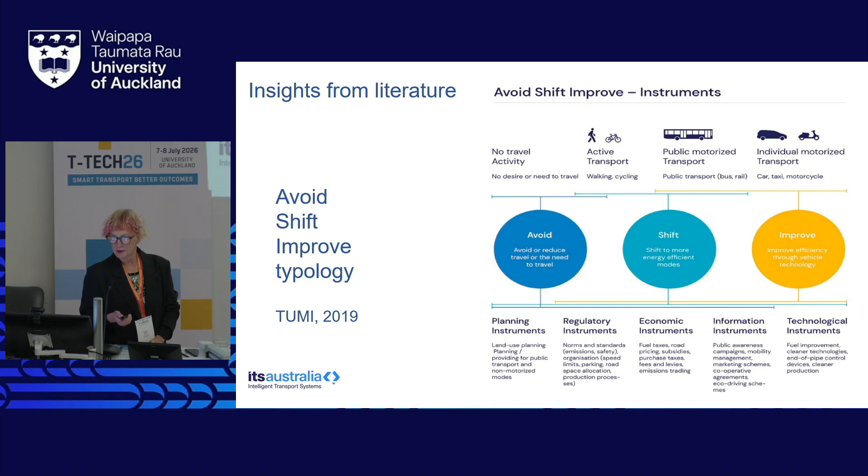Shift and improve: shift is getting people from their vehicles into active and other transport modes like public transport, and improve is usually the most expensive bit - service improvements, network improvements, and technological interventions that give people better opportunities to change their modes. These are the other ones. We were working from the top down.

Obviously, governments and other network managers do the capacity creation and network management side of things. We were looking at better understanding that behavioural change and other opportunities for moving people into different modes.

So taking all of that insight and the analysis from ITLS, we then interviewed some subject matter experts - people that work at the front lines of these things: disability activists, government agents, transport providers, and people from overseas as well. Just to get a better understanding of their experience with some of these interventions, so they know they work, they know they don't work, and that took us through to the survey structure.

As you probably know, designing surveys is really tricky. People don't lie as such, but self-reporting can be difficult - people can find it hard to remember how much they travel, why they travel, how they travelled. So it was designing a pretty complex survey around this concept of windows of change: different times of life, job change, employment status, moving home, change of life, babies leaving home - and taking them through a series of discrete choice questions to get a pretty definitive answer. Coincidentally for us, a lot of this is around price sensitivity and better understanding what the charge model might be if they want to change from a current system to a road user charging.

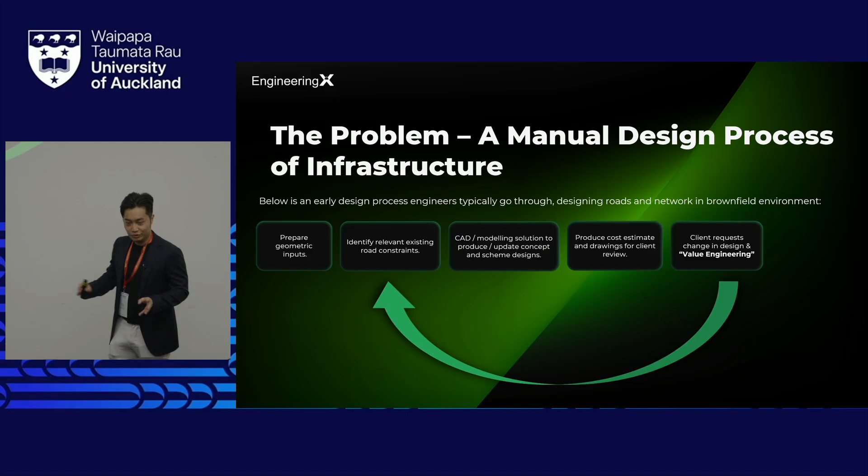That is the moment when engineers try to fit the design cross-sections into the drawings and find out there are a lot of pinch points and locations that simply just don't fit in the road. Some of the area of the road will be wide enough to fit the design cross-section. Some of it is just not.

So in terms of those pinch points, the engineer then checks the design requirement, makes some sort of suggestions of departure from standard, and then makes trade-offs to decide whether we add a speed table or not. Is it a cost constraint? Do we have enough cost? This is the process we call value engineering.

But the process of value engineering is manual and iterative. Why is that? Because clients simply want to give you feedback about the design you have made. They want to take your design to public consultation, get the feedback from public. They then go through internal design review process and give you feedback.

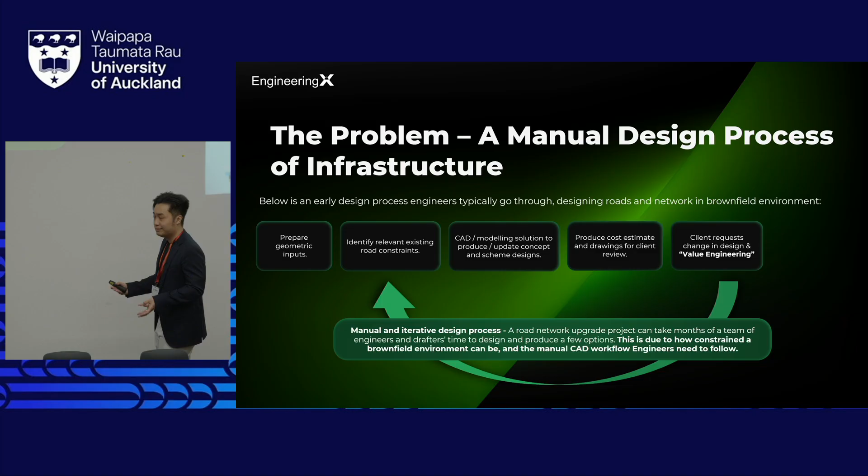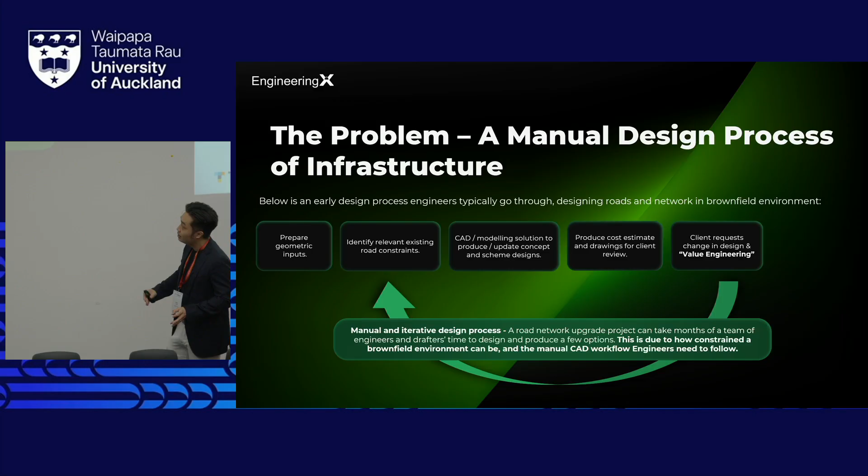So the engineer tends to take that feedback, update and iterate drawings. And this simply leads to providing just a few options - why is that, in a time span of months to years, only a few options? It's because of how constrained a brownfield environment can be. Something changed - simply a GIS input change because of the site survey data - can change how the design and how the drawings would be. And also, it's because of the manual CAD workflow that engineers need to follow.

After that process, multiple iterations, the engineer finally gets to the final design and cost estimate for the client. That's when the client receives the deliverables.

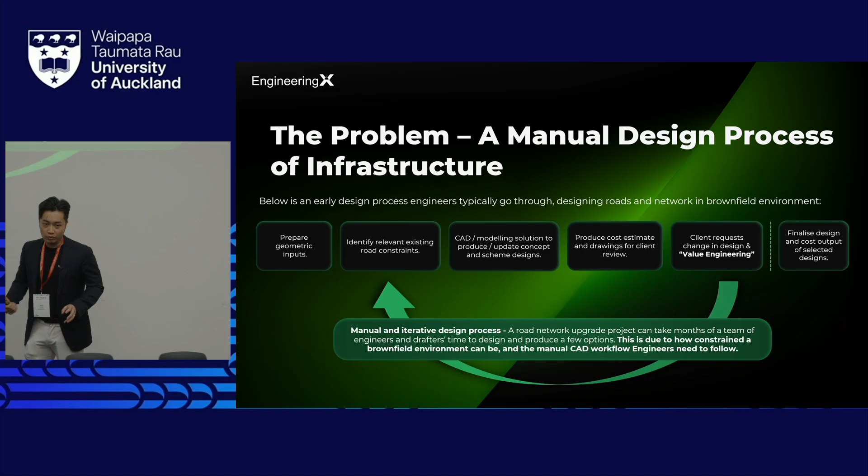What if I told you there is a platform, a software that can give you all design cross-sections automated, design drafting automated, vehicle tracking automated, network design, roundabout design, network multi-traffic phase analysis—all can be automated in one platform.

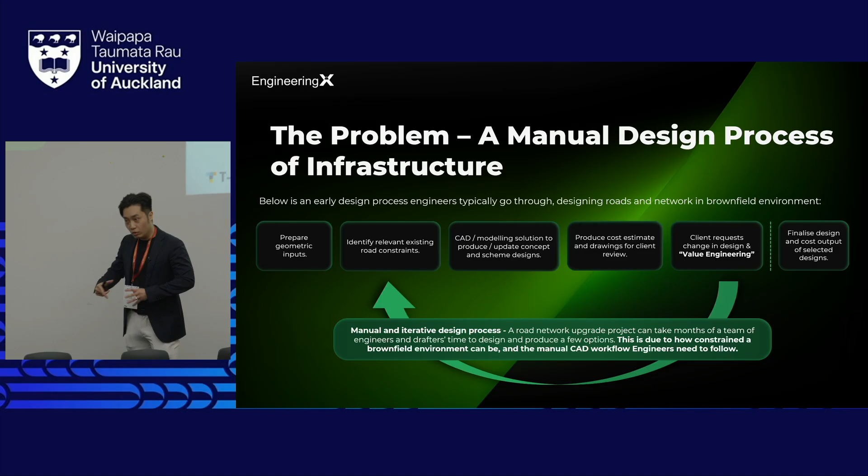We want to introduce you to AutoRoads Design. This is a design platform that takes all the GIS data when an engineer starts a project, simply takes that input, and automates design cross-sections, all the available ones. Based on different roads, we'll have different sets of design cross-sections. Engineer picks one design cross-section, then overlays and optimizes it into the road being designed for.

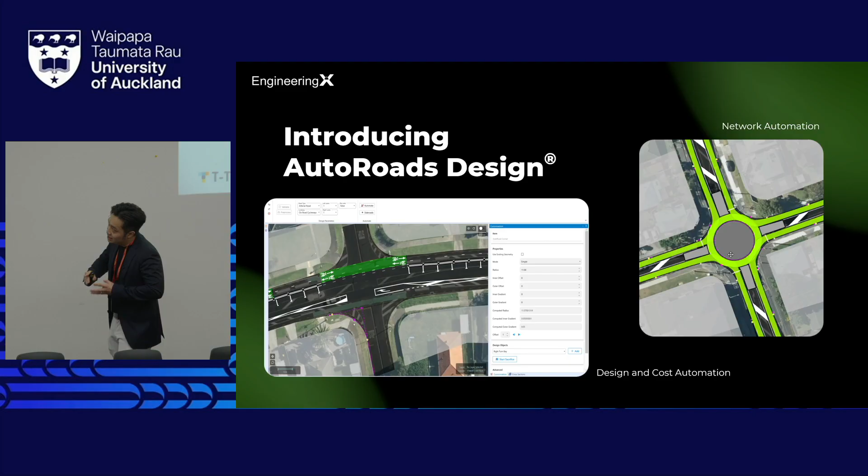And safety elements like speed tables and right turn bays can simply be dragged and dropped in the model space. You can see when you expand and add a right turn bay into the road, all the side road curves and intersection corners are automated together. Another example would be the roundabout.

You're dragging the roundabout into the intersection. You see the blue lines—the new curb lines—all automated, pushed to the side. And all the surrounding green hedge-like shape is the vehicle tracking. In a roundabout design, we have all the vehicle tracking automated, wrapping around the central island, making it really easy for the engineer to see the pinch point, understand the site, and make design decisions.

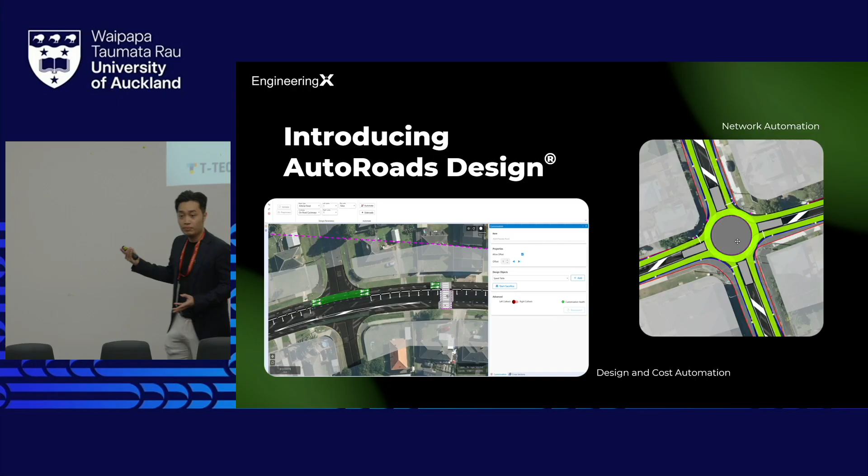Whether we have a bus as the design vehicle, we can automate it. We have a car, or delivery van as design vehicles, we can automate it accordingly. So no drafting required.

Every constraint affects engineering decision. Think about a right turn bay—different width means the road will have to be widened differently. A speed table, whether it's a Swedish type, normal speed table, or even a speed hump, has different width requirements, widening the road differently and affecting different utilities. The position you place the speed table will also affect how vehicles come in and out of the driveway. And simply placing a bus box adjacent to different driveways might cause coordination issues with property owners and so on. So every constraint affects engineering decision.

AutoRoads Design takes all these constraints, and it is a coordinated system that considers every single element in here. We know that if we move something, the adjacent area would have to provide spatial requirements and enough width. So this is a coordinated system.

You don't need to go back to AutoCAD, go back to OpenRoads, then send your drawings to different places to get what you need. This is one single platform where you can get your cost, you can get your design—we're not talking about months, we're talking about minutes and days. Your client will get all this design information in the earliest phase, so the client can make the most informed decision about whether a project can be delivered from the start or not.

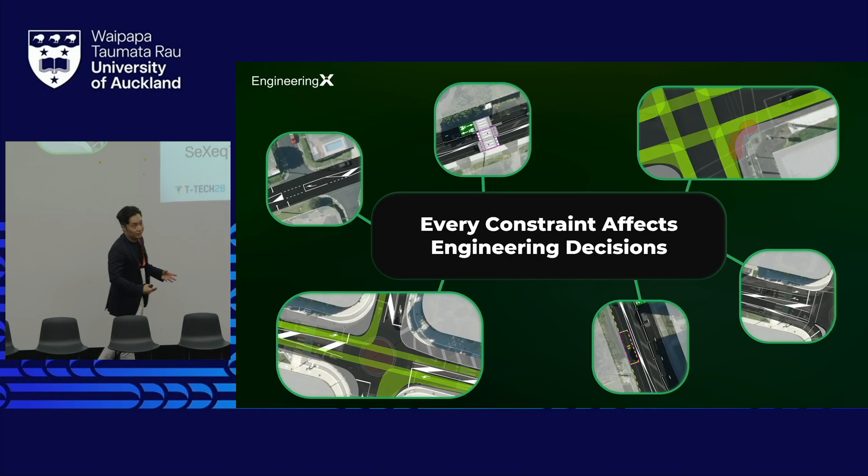One of the driving factors in our software is called the vehicle tracking engine. I've got Han Wei Peng here, our CTO, who will talk a little more about how vehicle tracking works in our automation software. Han Wei, hand over to you.

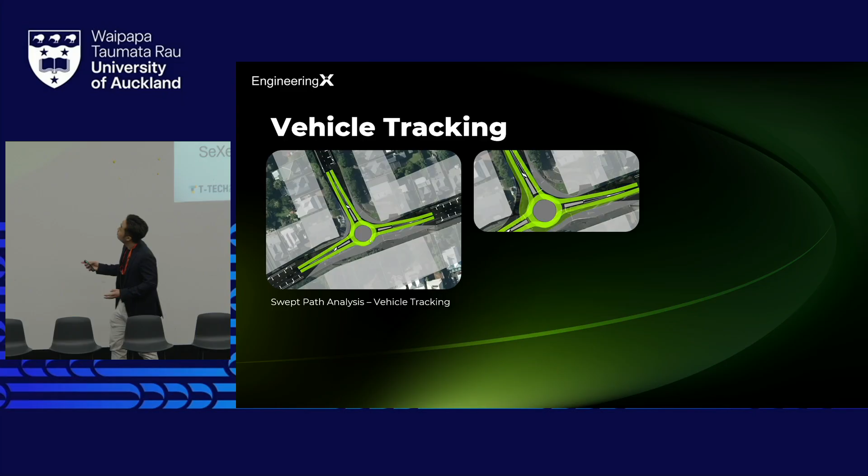Thank you, James. When we think about vehicle tracking, we think about swept path checks around these vehicles on the road corridor. But I want you to think about what if, in a brownfield context, there's a harder problem to solve to enable the system to work. If we think about vehicle tracking in a brownfield context, we think about vehicle tracking through multi-obstacles, where we have to avoid multiple islands, multiple clearances, and various curbs along the way.

For example, in this roundabout you see, there are multiple ways to actually go through it. With our innovative solution, we provide vehicle tracking where we can avoid the circulating roundabout and update it speedily in real time.

What does this mean? This means that in comparison to AutoCAD, where we use static vehicle tracking with an individual tracking profile that's not tied into or integrated with any sort of systems, we're looking at manually having to track through an iterative process to enable a design.

What we have provided now is an integrated system which includes tracking as part of the customization process, and engineers are able to update items interactively to get real-time information about where the design can be better and in which way we can improve the design very fast and very reliably.

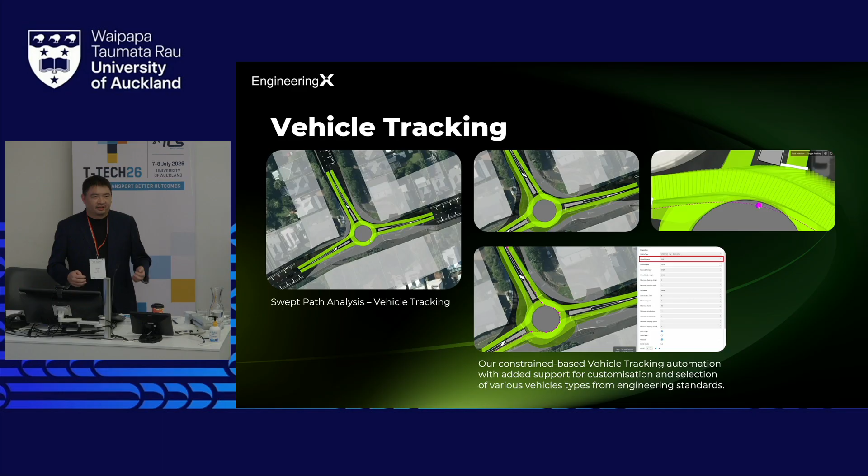Now I'll pass on to James. Just seeing the time limits. So just to conclude what we bring to you guys today,

Engineering X is striving to provide a solution for all the engineers and end users here to deliver better solution, better options, better value for client through providing a lot more options, not just multiple options in the traditional design phase, but we're providing 10, 20, 30 design options in minutes and days rather than months to just multiple options.

So with that in mind, we would like to thank everyone for listening to us and really thankful that both Hanwei and I come back to present to our university, to our previous lecturer, and to you guys. Thanks.

Thank you for keeping to time. We're running a little bit tight, but I'll ask one question. Is there a case study where you have already implemented this design software into practice, into New Zealand real-world projects for Auckland Transport or NZTA, to prove its robustness and validation?

Yes, we have. We've been in pilot and proof of concept engagement with leading agencies like Auckland Transport and international consultancy to validate our software. Positive results have shown. For example, one case study is an Australian project where they took our software to automate intersection design in minutes. Those results were then exported and provided to the client, and positive feedback came back. This proof of concept and pilot engagement is ongoing, so there will be more case studies coming in the future very soon for the public to see.

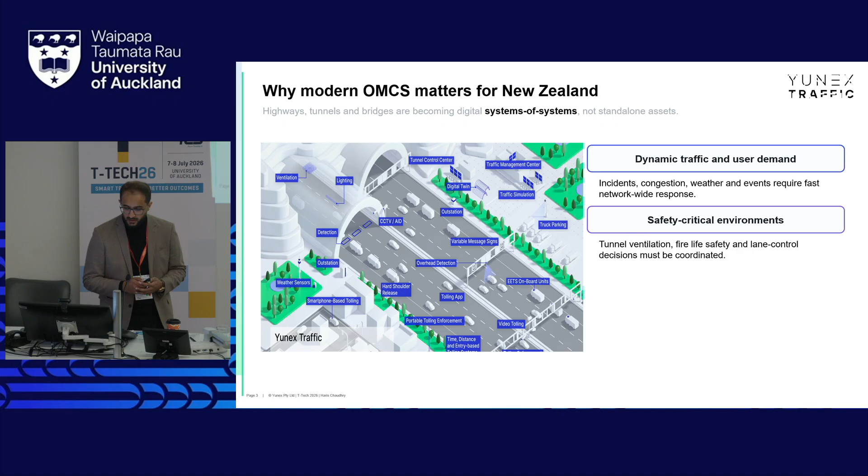So the question becomes, what do we mean by, or why do we want the OMCS to be modernized? Simply put, I can put it in three terms. Number one is the dynamic traffic and user demand. As the population is increasing, the demand is increasing, the use of technology is increasing, and we have to make sure all those technologies work in harmony with the strict safety compliance requirements. We have to ensure we're providing support for ventilation systems, fire life safety systems, and typical lane control systems that are part of any transport software.

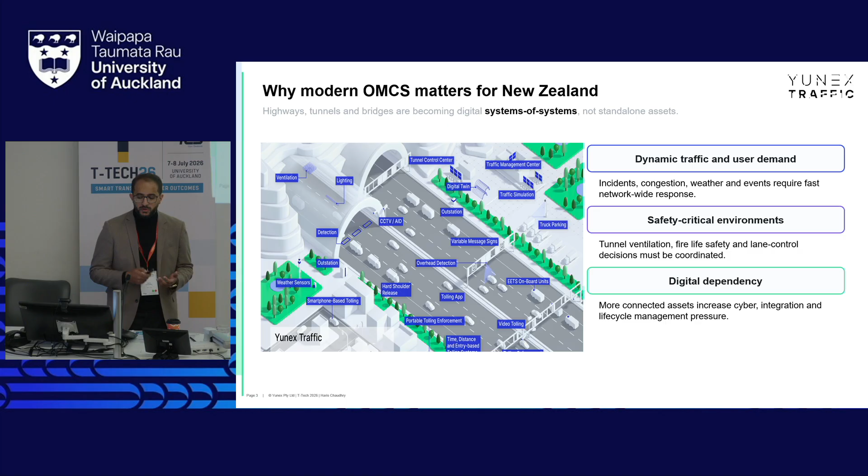And finally, the digital dependency. As we move toward integrating more and more software, the inherent risk of security and incompatibility is going to come in, so we have to make sure we are adapting. That's where our solution basically comes in.

That's the question of why we need to move from legacy OMCS, to ensure we are addressing these rising safety expectations, meeting dynamic traffic demands, and evolving cyber threats in the operational technology space. One fundamental issue is that previous legacy systems are hard to change. If you have to move on, you most likely have to move the whole system to a newer version of it. So, coming to the approach.

The approach we're going to take is modular, adaptive, and resilient. OMCS is now essential, therefore, not just an option that we should bear in mind.

Quickly going through the key salient features of the innovations we're taking: in our modern platform architecture, to make it resilient, scalable, and secure, we are adopting a self-contained system architecture, basically decoupling the UI, logic, and data. We're adopting a Kubernetes-based platform solution, which helps us scale, recover, and roll out changes using the latest DevSecOps tools. We're ensuring cybersecurity by design from the beginning, because integration always brings challenges with different integration factors, so we need to consider cybersecurity from the very start.

And first and last, the most important one is to give a unified user experience to the operator. We need to have a centralized, single front end, which is easy for the user to operate.

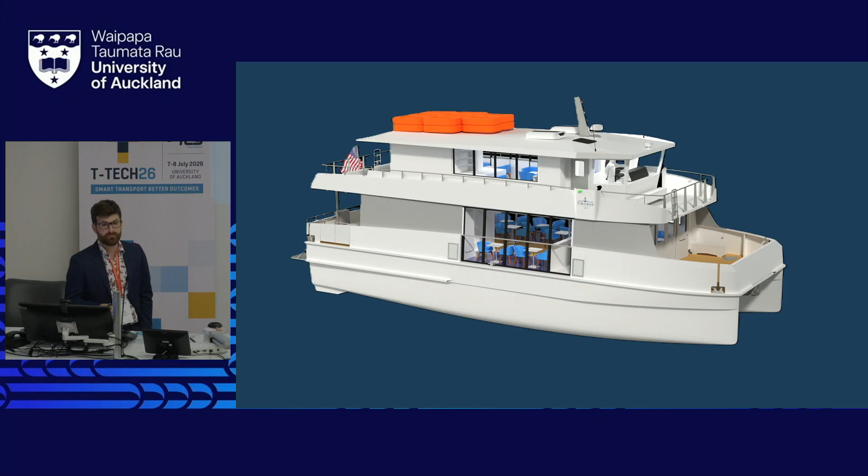A little bit about the boats: they're 24 meters long and carry 200 passengers, which puts them about medium size for Auckland. They're quiet, just like an electric bus—great boats to be on board. You can hear conversations from the other side, which could be annoying, I suppose, they're so quiet. A little bit after this photo was taken, we actually clocked 30 knots, which is around 55 kilometers an hour, and as far as we can tell, that makes us the fastest electric ferry in the world.

They're extremely capable—Auckland Transport will receive a boat that will primarily service the Half Moon Bay route, but they're capable of doing any route in Auckland, including the harbour and outer harbour, such as Gulf Harbour or Pine Harbour. The other thing invisible in this photo is the data side—boats can also be intelligent transport systems. We're transporting an enormous amount of data, 800 points per second, which translates to 3 gigs a day for a single asset, about 1 terabyte a year.

The software that does this, I spoke about last year. It's called Deputy, and it serves a few functions. One is the dashboard you would expect from an electric car. You get a tachymeter and some gauge for your state of charge.

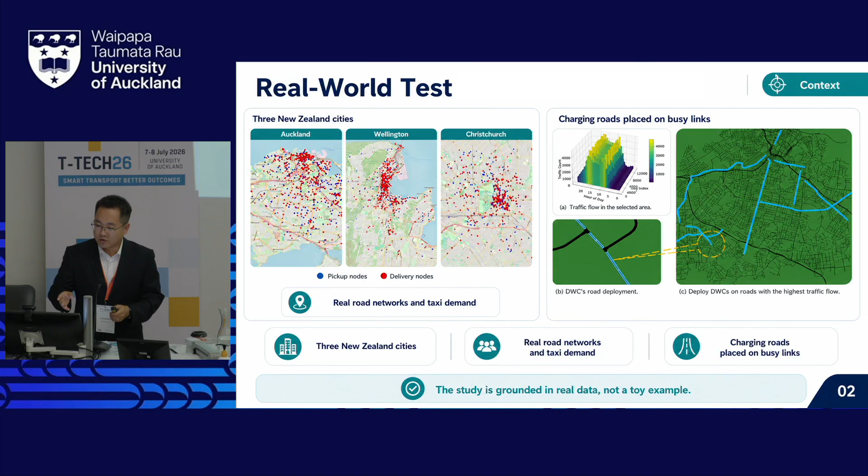As the figures show, the blue lanes are the dynamic wireless charging roads. We deployed them this way because we got traffic flow data from AT, and selected the highest traffic flow lanes to deploy them, so it's a kind of simplification.

For another data source, we have the Auckland, New Zealand taxi dataset. We mainly selected the Auckland central area, Wellington, and Christchurch areas to do tests across different city scales.

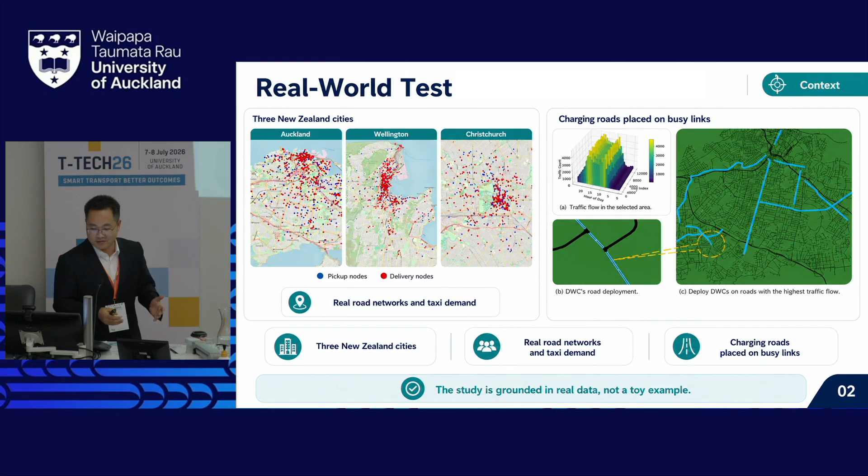We propose a very complicated algorithm that's really hard to explain in detail, so I mainly extracted the key points and asked AI to help give brief introductions. First, our proposed algorithm works just like ChatGPT.

When we ask ChatGPT how are you, it responds I'm pretty good. So first we consider how to process the 'how are you' - meaning how many SAVs and vehicles we have, where the dynamic charging roads are, how many passengers there are, and where they are. All this information is input to our model, and in the second step our model tries to understand and process all of the states.

This state is quite complicated - I can't even fully grasp it because there are so many layers of neural networks. In the third step, we score the choices. Like if I ask you how are you, and you say I'm pretty good, then I'll score that response. Each response gets a score - something like 'the weather will be good' would get a lower score, so we won't give that response, but 'I'm pretty good' scores higher, so that's the choice we give.

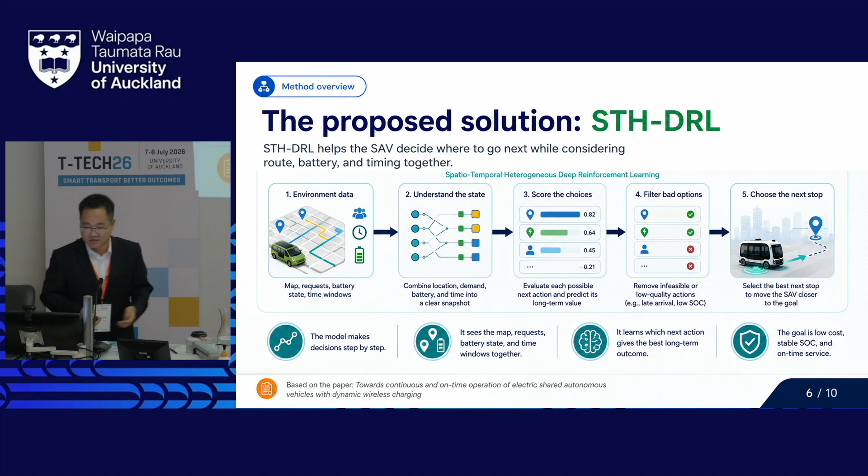Then there are passenger time windows - if we arrive late or early, it's not good. We have to select nodes where we can arrive on time and coordinate between potential vehicles to get them to work together. Then there's vehicle capacity and dynamic opportunities. So we first get a lot of candidate actions, then use filters or constraints to find feasible actions, then optimize them.

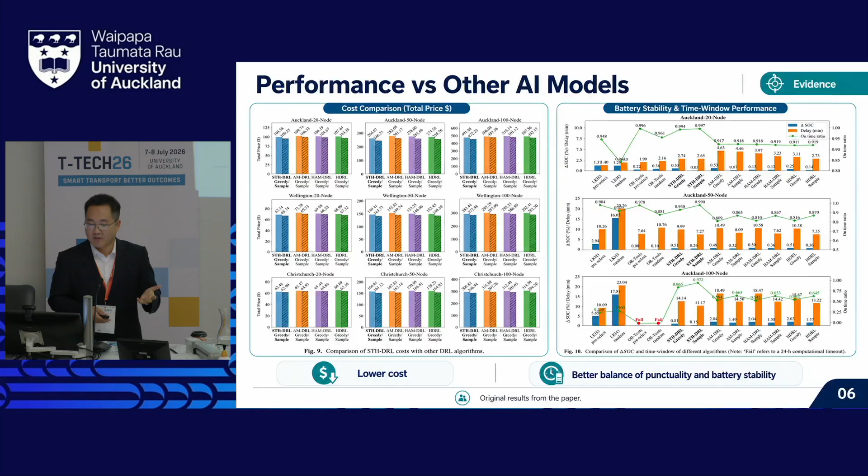We can reduce a lot of congestion due to this kind of ratio. The coverage ratio of the dynamic wireless charging road is only 5.5%, and a power level from 25 to 50 kilowatts is enough.

Most importantly, we can reduce the battery capacity. Conventional and traditional taxis have to carry a very large battery capacity, more than 50 kWh, but larger capacity means larger weight and larger energy consumption. Using this method, because vehicles can be charged during driving, we do not need to carry a large battery - that's great.

So what does this mean? For fleet operators, that means we get higher vehicle utilization because the vehicles can run continuously. Our research has proved that using this AI method, it can run continuously for 24 hours, no need to stop. But of course, if there are no passengers, we have to stop.